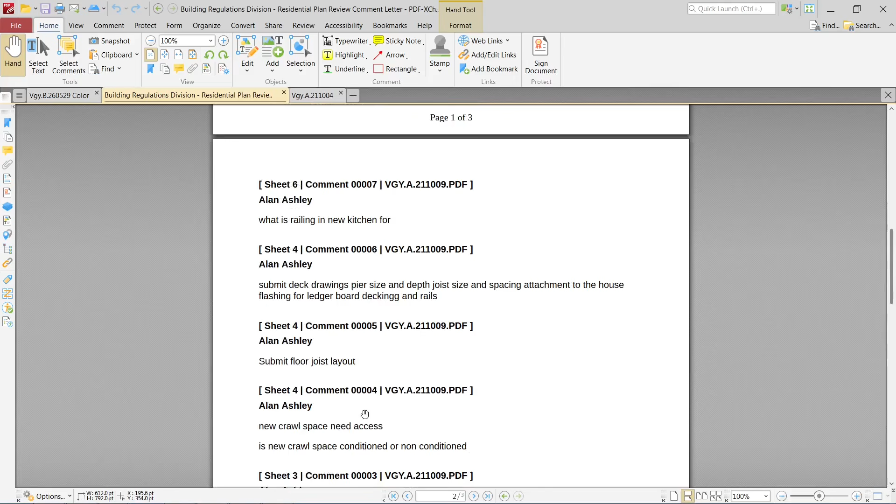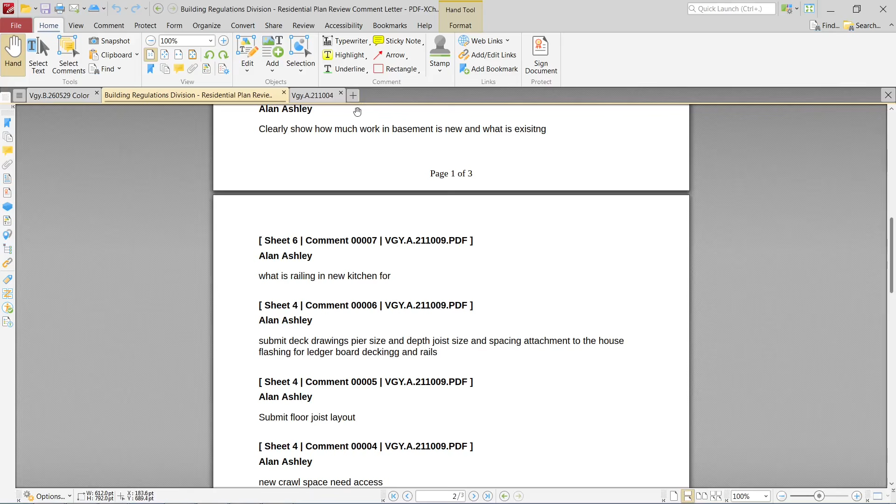When I first started reviewing there, I looked at what plans they were looking at, and I actually couldn't find that one. That's dated October 9th of 2021, but the later one I found was October 4th, dated 9/27. In any event, the drawings the county has are preliminary and incomplete construction drawings, so that wasn't even something they could approve anyway.

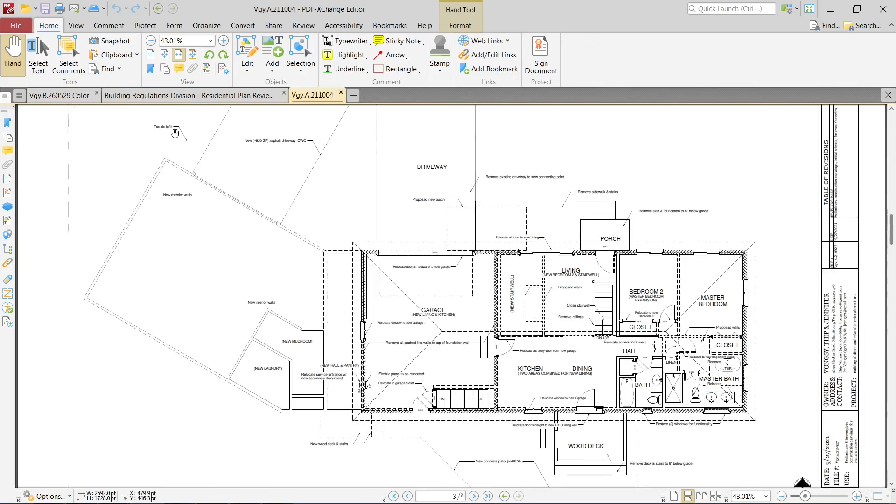And then as you know, our project became quite a bit different. So first of all, I endeavored to simplify what the county was going to have to look at by putting these notations up here.

Second of all, and this is for the contractors' notification or education, these dimensions are all within probably about 1/8 of an inch. I wasn't going to get down to 1/16 for that, so I would just use these major ones and you should be okay.

Secondly, we're using regular 4-inch brick veneer, and I use 10-inch walls for that arrangement with the frame on the inside, a typical cavity wall with the brick veneer. Over here though, we're wrapping this, so we have a change there, and that's even a little wider still, a double wide wall or a solid thicker wall as shown. Now this should get them to stop asking any questions about anything going that way at all.

But inside here, I don't know how I was going to do it in 2021, as those drawings weren't even put together. Once I started putting these together, I began to understand some of the things. For one thing, we want to put 4-inch brick veneer across here as well, and here they were able to do that because the interior wall is just this 4-inch CMU running all the way up and plastered on the inside, or furred and plastered on the inside on the main floor upstairs.

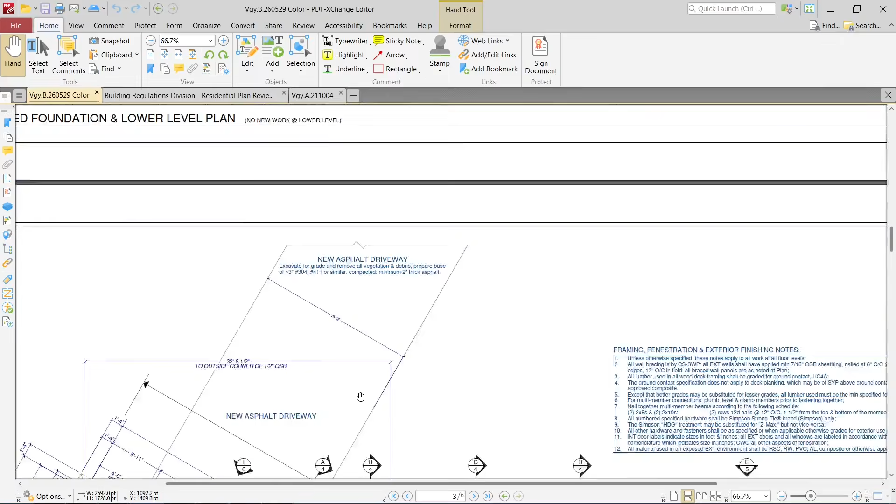That's what I'm showing here, and that must have been what my investigation in 2021 showed, that these walls were furred on the inside. You're proposing adding these 4-inch walls inside using closed cell spray foam to reach their R19, which they'll want in anything that we're going to be modifying.

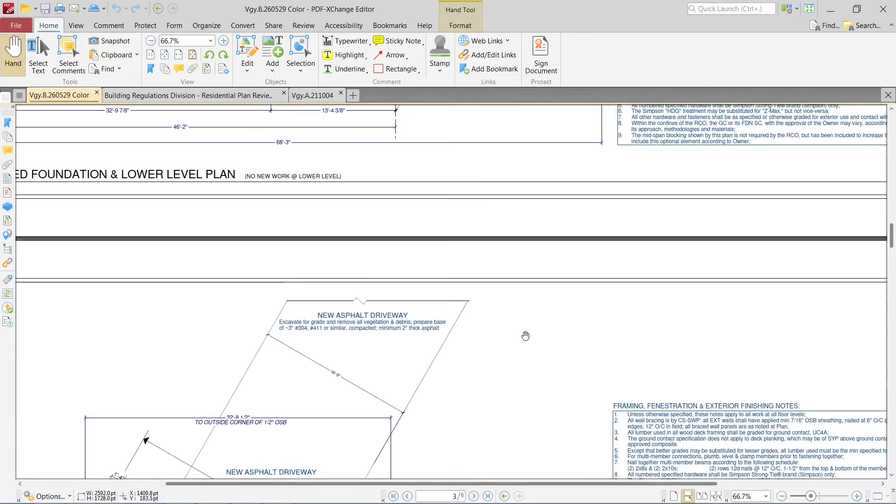The problem with those 4-inch walls going up is they will no longer let us do that sort of construction and let those trusses, the new trusses, bear on those 4-inch masonry walls. So when we did this down here, we have to have all of our bearing on 6 or 8 inch walls in this area.

When you look at that section C through there, you see what's happening on this floor: in the area of the opening where that's going to be reframed, that's 2x6 walls there, and then all this interior is 4-inch walls, and drywall flushes up across here.

Now go back here, this here I have you going down 4 risers, and this is a border plank here for these planks to end against. So that's 1, 2, 3, 4, and you're down at the garage. If you look at that section A4 through there, that puts that about 30 inches down. If you slope this slab this way, that puts that about 30 inches down.

That makes this corner over here pretty tall, as you can see from some of the elevation views right here. So if you want to drop that another 8 inches, another course of block out here, you can do that.

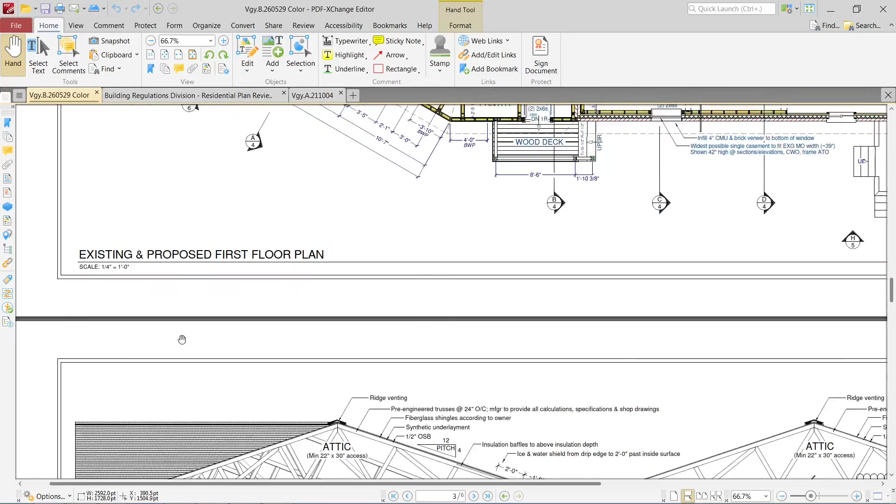And if you want to make these walls taller, these framed walls would become 8 inches taller. I don't remember what those are exactly, but those walls are 9 foot 7.5 as shown now, with that down 27 where it's crossing in front of the stairs. So you could drop those another 8 if you want to.

If the terrain is not working out well for you with the driveway, you want to drop that an extra 8, you could. And at that point, you could either add that 8 inches onto this, where this becomes about 10 foot 1 or so.

But if you want to get R49 over this new garage, if you propose to insulate that, I show this R10 at the garage foundation regardless, so in case you decide you eventually want to insulate this garage, the foundation is insulated. You can't really increase this heel height and maintain what we're trying to do outside. So that heel height is kind of minimal right now because that's how it was built, and now the energy code would like that a lot taller.

So if you wanted to drop the trusses, if you wanted to drop that and get a bigger energy heel in the trusses over this region, over all this here, this room becomes—right now the room's going to finish around the same as this.

It should finish the same as what's happening out here. If you want to get some more energy, heel particularly out here where it's going to be heated, you could drop those trusses 4 inches or even 8 inches, and then this room becomes a shorter room, not as high. In fact, you could actually have this room step down, but I don't recommend that with the bath out here. I like you just coming through. So I wanted to cover those couple things.

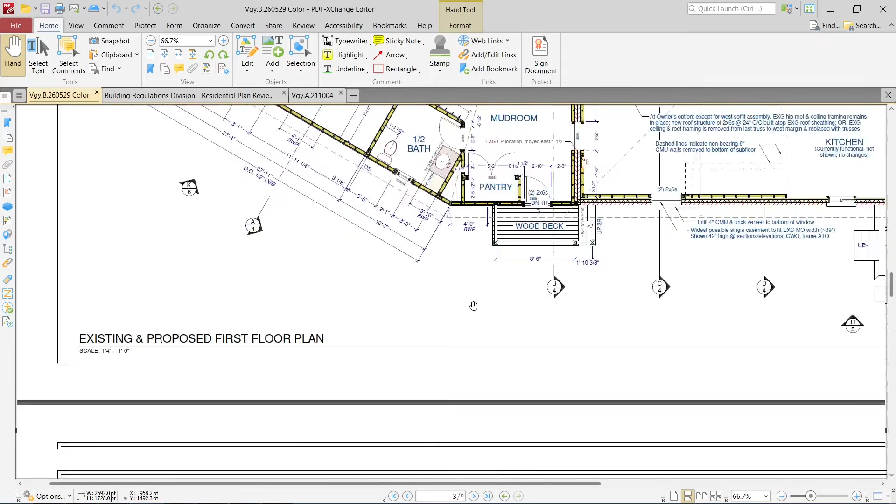So what you have to do then on this foundation plan here, I ended up showing all these joists so that he wouldn't have any further questions about it. One thing I'll cover real quick: this solid blocking is not required, and I think I made a note of that somewhere, but it does stiffen that whole floor system up, and it's just these 3 20-foot 2x10s.

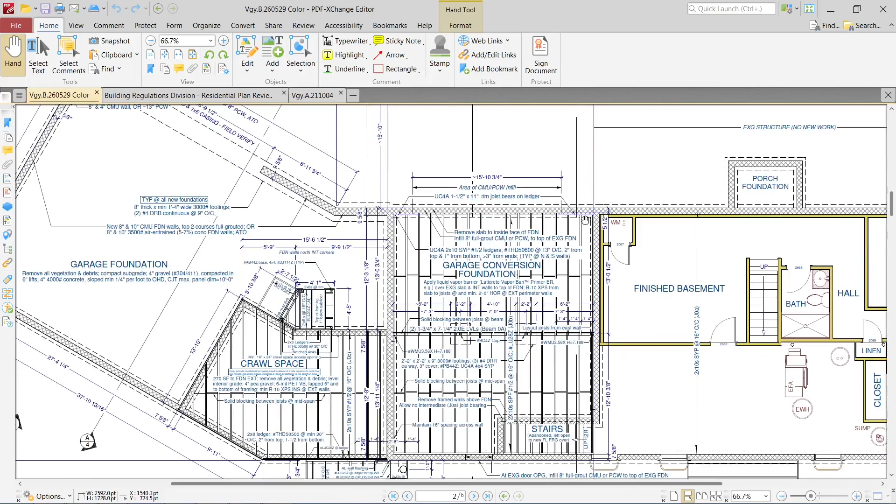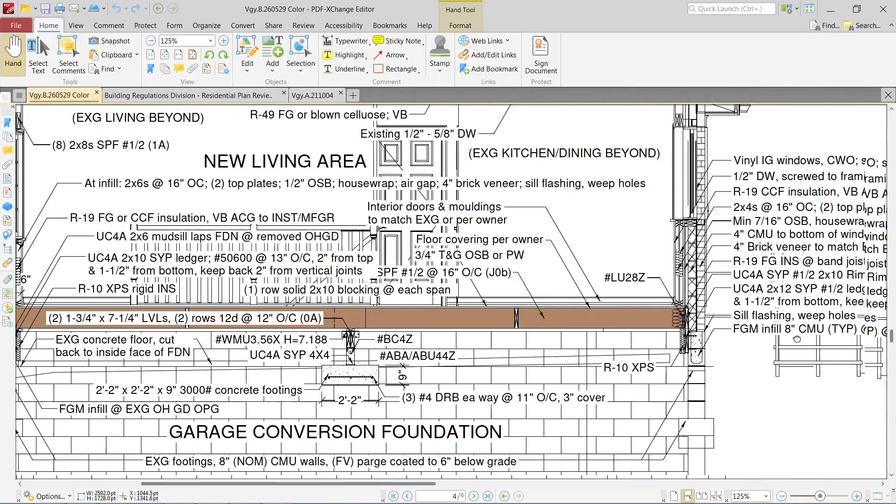But over here, what has to happen - because we want to bring these joists up to where these ones are - what we're proposing, if you look at section C4, is we're going to put a ledger on each side of these, down below where the foundation is a full 8-inch foundation, so that's doable. So there you can see it right here, this 2x10 ledger. That's consistent at both the front and the back, and that is set down below.

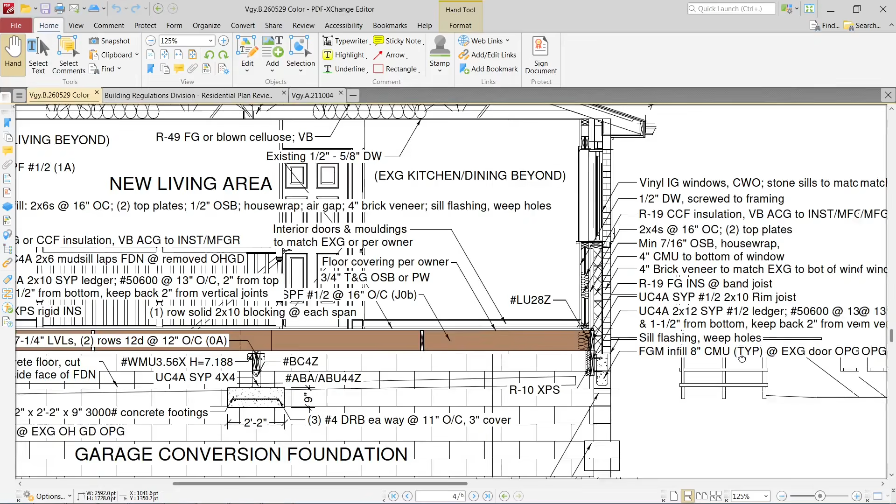The top of that is finishing out at the bottom of the new floor joists, and they still get a band joist, a typical band joist. And then those ledgers are fastened to that wall according to what I show here with these 1/2-inch anchors on both sides. That's what happens.

But in the area of the garage door, you actually have that 6-inch wall, that 5.5-inch wall, 2x6 wall above that. But the joists extend and actually sit on this mud sill that is sitting on that 2x10 ledger, just at the garage door opening.

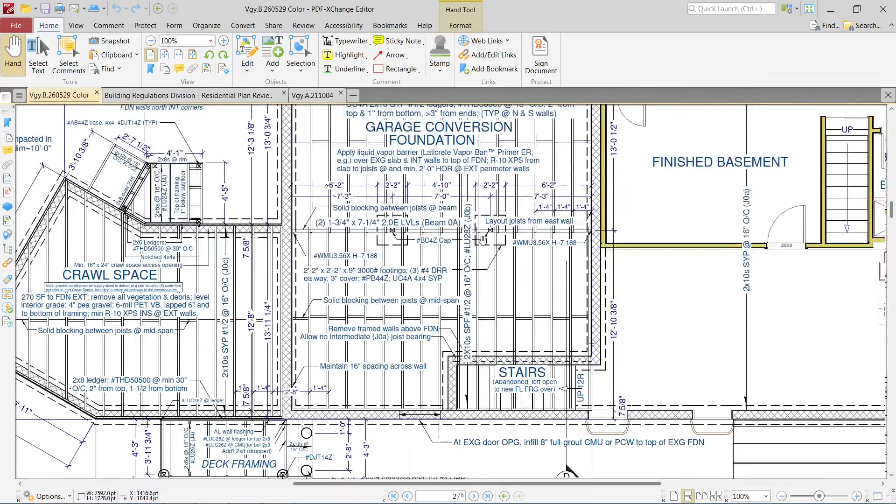And the only real custom work is on either side of that garage door. It was actually about that point, or a couple minutes later, that I discovered what I consider a pretty good error, so I'd like to correct that. If you've already submitted them to the county, we'll just leave it alone for now, unless they ask questions later. But you should build by the way I've modified this, because for one thing, this 11 inches would just be an error. If I was going to do it this way, this rim joist would have been 10 3/4.

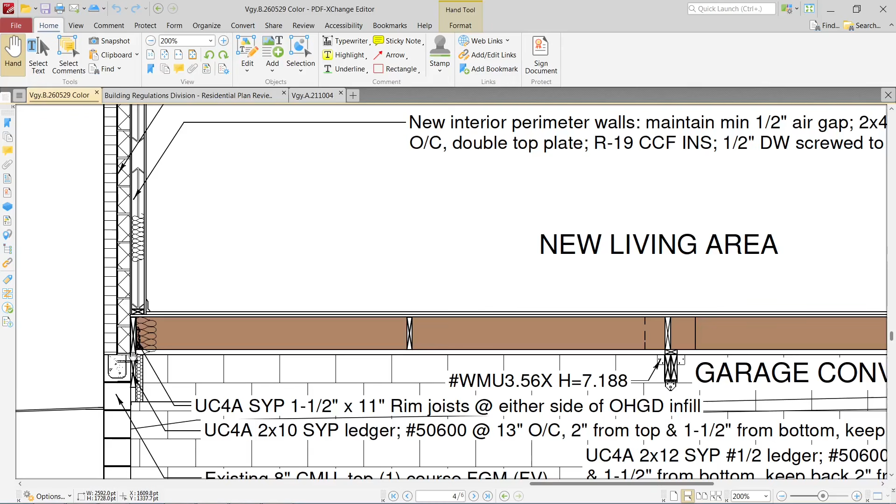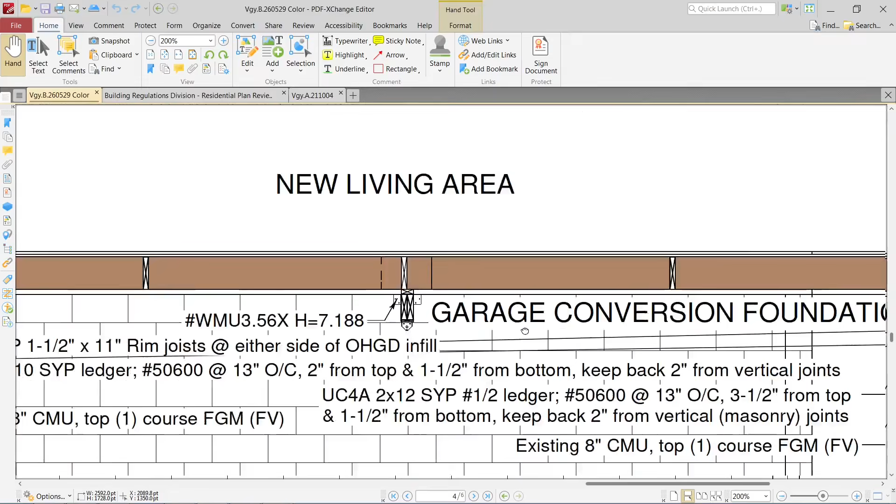Similar situation here, where the ledger that we were fastening to that CMU wall was pushed all the way up to the bottom of that rim joist. And to me that doesn't make sense from a number of standpoints, so I have modified that.

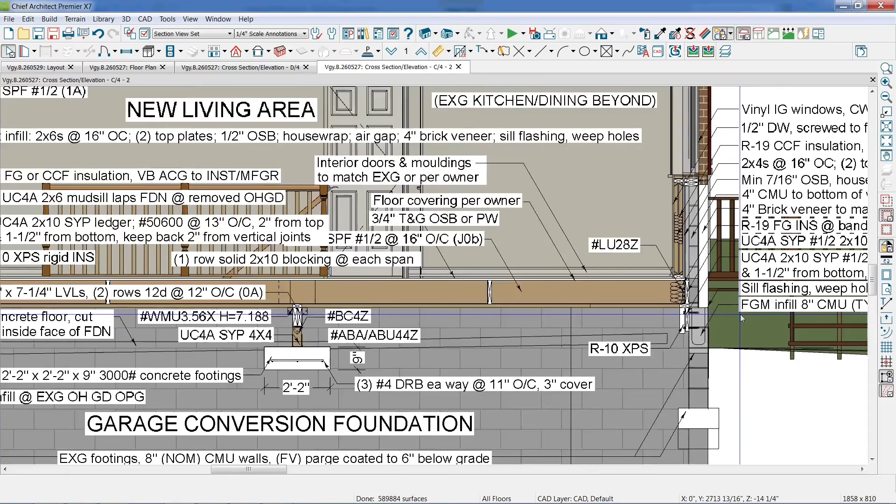Now, at the back, for one thing, I had that one mislabeled as a 2x12. That is a 2x10. Both at the north and the south walls are 2x10s, treated 2x10s, fastened as it showed. And it looks to me like it'll be a close call on whether, if you build it at this elevation, that floor slab would have to be cut or not.

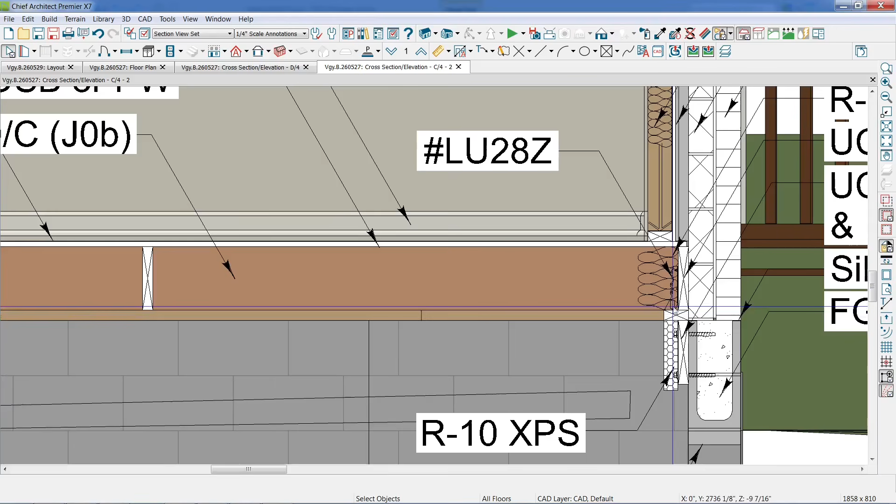But now it's just going to be your typical 2x4 plate on top of a typical 2x10 ledger. And then this still uses a hanger up here because they're not going to trust that that will work, but it does provide you a good way to connect this system to the ledger.

And then out here, this is what's happening at section C, which is right through the garage door opening with the 6-inch wall over.

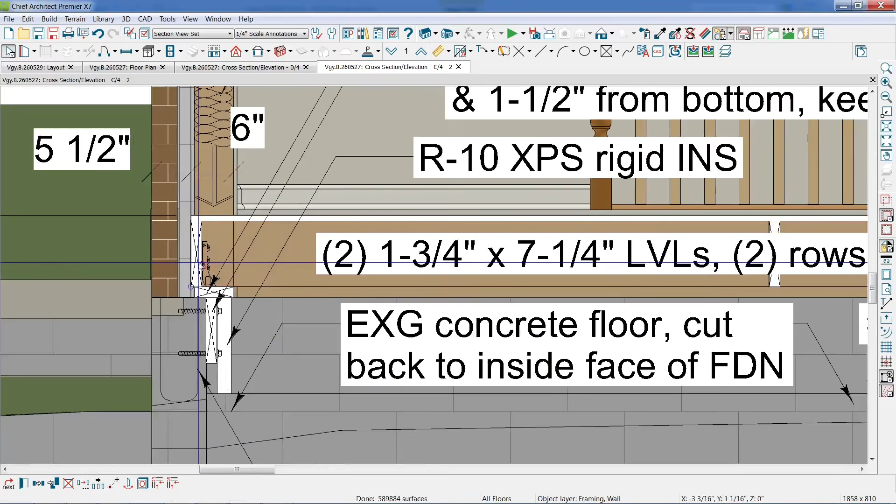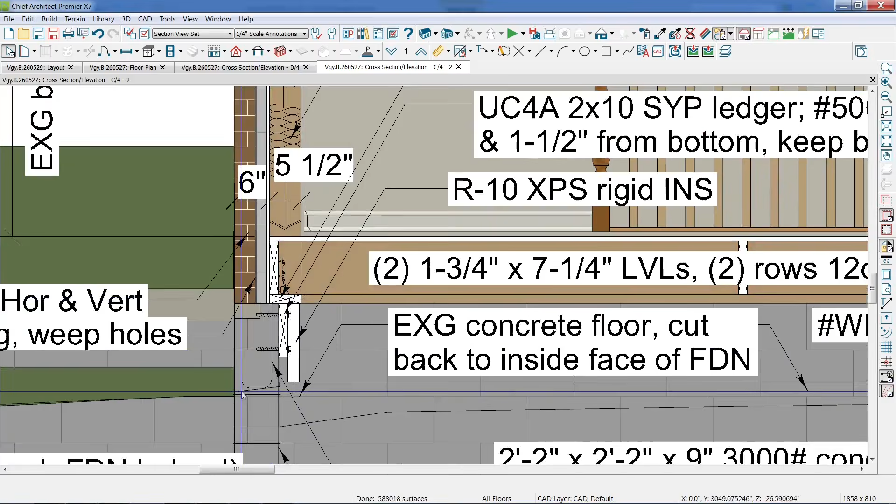And at that point I looked at this little section here through the infill a little closer, and this is how that's finally modified, where the 1/2-inch OSB comes all the way down across this rim joist, and the rim joist sits on a 2x6 mud sill. And at section, and then at the back side, this has been changed to the 2x10 from 2x12 and made that clear.

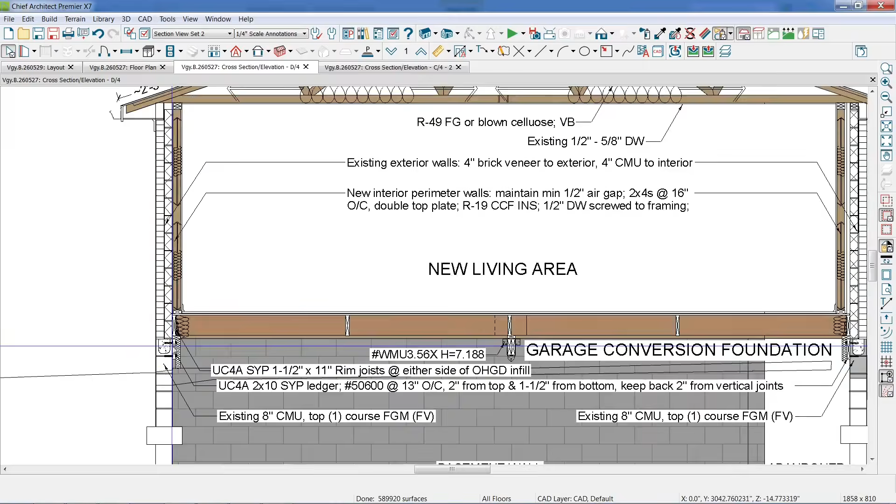And then over here, where it's just going on either side of that garage door, then the mud sill - this is shifting a little bit. The mud sill shifts a little bit. The ledger does not, but the mud sill and this rim joist shift a little bit. That rim joist shifts roughly 1.5 inches south on either side of the garage door.

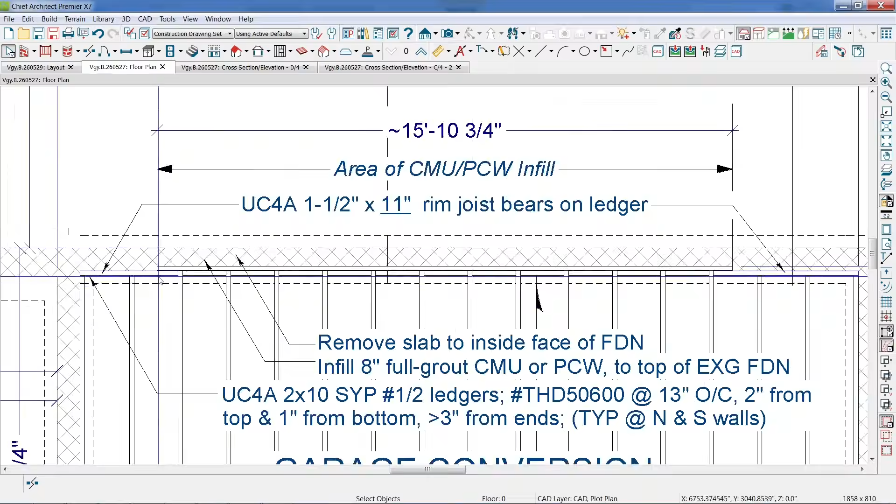And so this is a rim joist here, and this is a rim joist here. This line across the bottom is the continuous 2x10 ledger. I hope that's clear enough. Now this note here will just get changed like that to make that a little more clear.

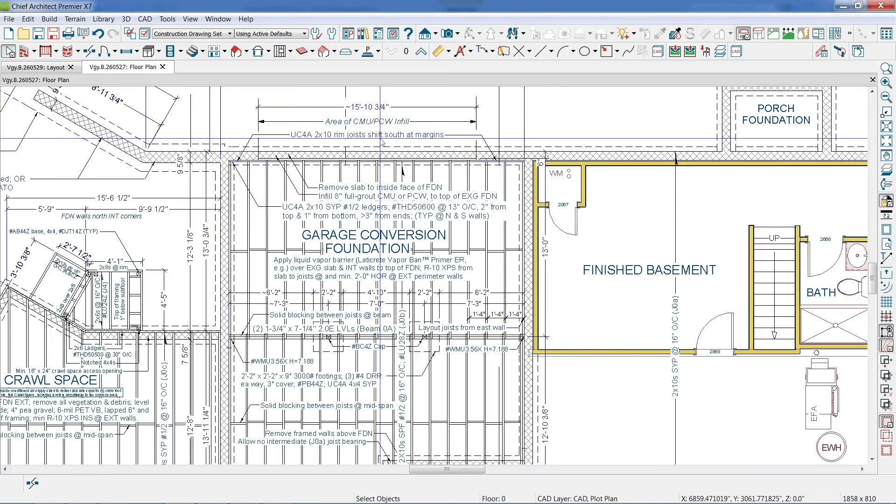So there was just this change at the floor plan, and there were corresponding changes at C and D, elevations C and D, and that's about it.